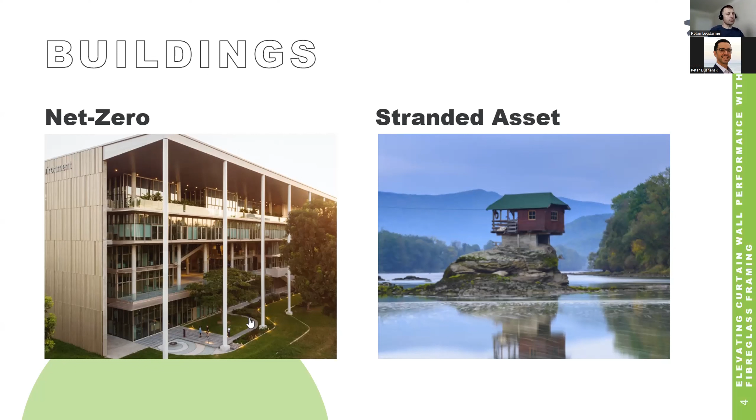Let's introduce a little bit why we had this presentation today. We need to live more and more in net zero buildings, and we want to avoid living in a stranded asset. But it's a little bit complicated because first of all, we have our existing building stock that we live with, and there's a lot of different things coming towards us. But let's explain how to approach and how to get to a net zero building.

First of all, net zero building, how do we see that? Net zero building, we mainly focus on operational carbon, but don't forget that also embodied carbon is an important aspect to cover. And how do we cover all these topics? We will go a little bit deeper in modern construction methodologies, low carbon supply, and then in the operational carbon, low energy use, measurement and verification to check if the implementation performs like it's needed, and going in the building operations. So that's for us a net zero building.

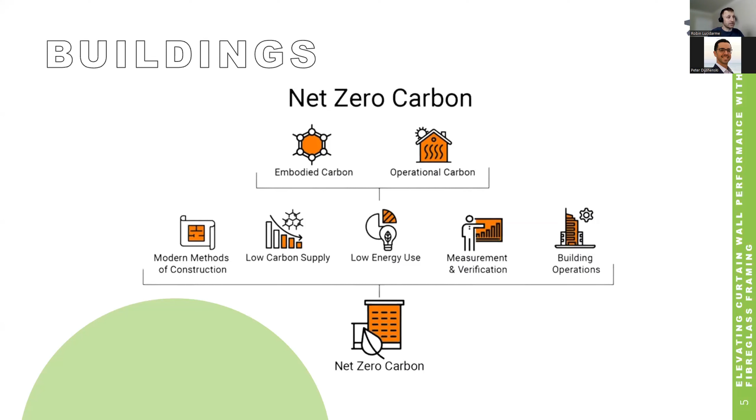Why do we explain that? If we want to hit our targets 2030, 2050, we see that the majority of the buildings, like 50% of the buildings, will still be there in 2050. And to hit our targets, there's two strategies. We can start with new buildings, tear it down, and then lower our emissions with 500,000 tons per square meter, or we can use our existing buildings and do a deep energy retrofit and lower our emissions even more.

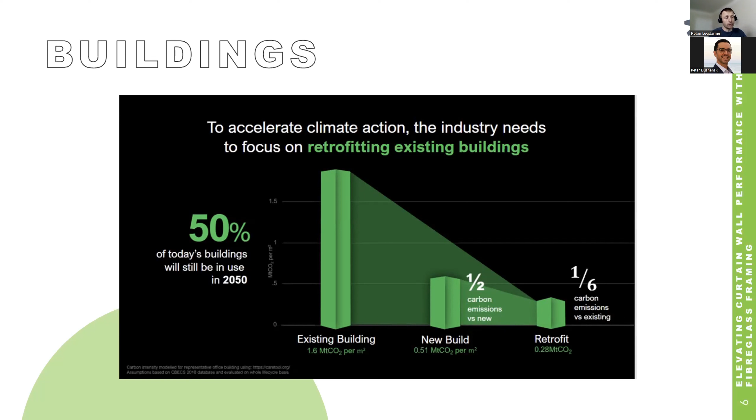It's a little bit also complicated. And why do we do that? We say, look, if you look at the buildings, you can see here 70% is going in operational carbon, but don't forget that 30% is also in the design and build. So that's why we wanted to go a little bit deeper in the technology of GlasCurtain as well.

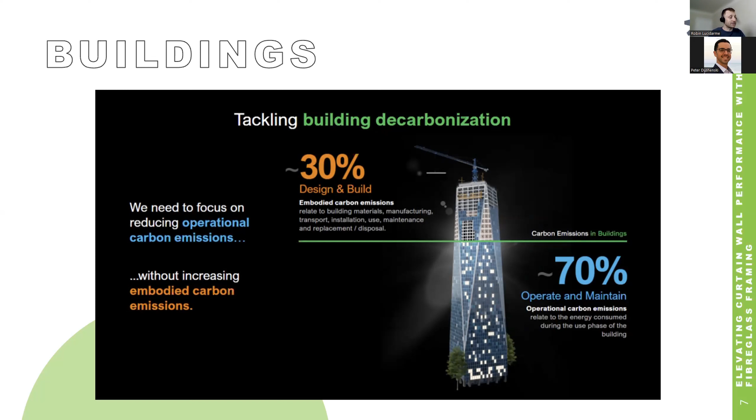So if you're a property manager or you manage a lot of buildings, the question is, do you have your class A, B, C, or D buildings? What are you going to do with it? Are you going to do a new build or renovation? And every building type has its advantages and disadvantages, but this is the situation we live with. And that's why we try to create strategies with the current technologies that are available on the market.

What is pushing the agenda to upgrade all these buildings? There's a lot of different things that happen. So for example, we have the carbon tax, and then we see in Vancouver, for example, we have the GHGI index that has also been used in different states, like the Local Law 97 or BERDO or BEPS, where your building gets an energy score, and you also need to report emissions, for example, commercial buildings larger than 50,000 square foot or multifamily larger than 100,000 square foot. So your building gets an energy score and indirectly also a property value.

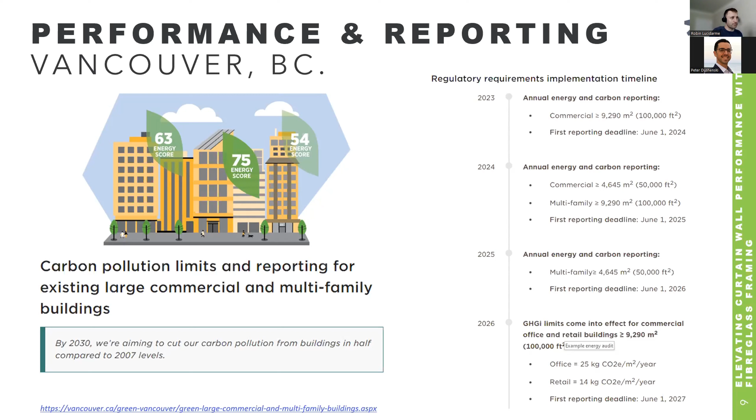We see that these values are sometimes difficult to report, but these values are imported in the Energy Star Portfolio Manager and directly reported to the city. Okay, what does that mean? So a typical building is using electricity, gas, and also water. But here we see in an energy audit that we have energy that's used for ventilation, lighting, cooling, and then lots of energy in the boilers and make-up air handling units. And we want to lower that as much as possible to avoid these penalties and lower the carbon tax.

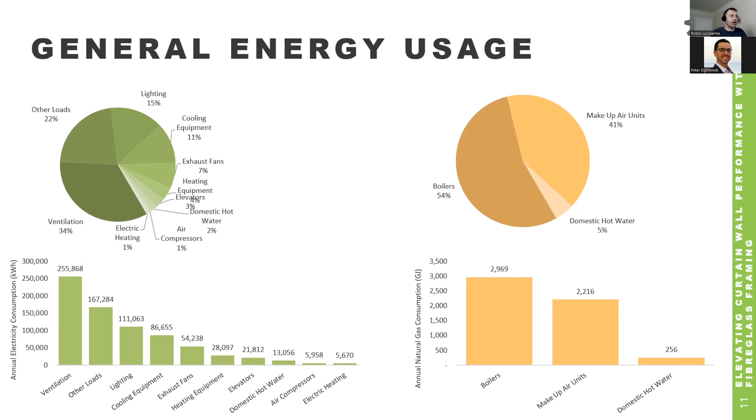But we say if we want to do that, we as stakeholders in managing buildings need to look at it in a different way. So how do we say that? You can approach it a static way or a dynamic way. And we want to go a little bit deeper in here. So the majority of the people, and sometimes we do that, but we try to adjust our model, say our utility data is, for example, $900,000, but we keep that flat.

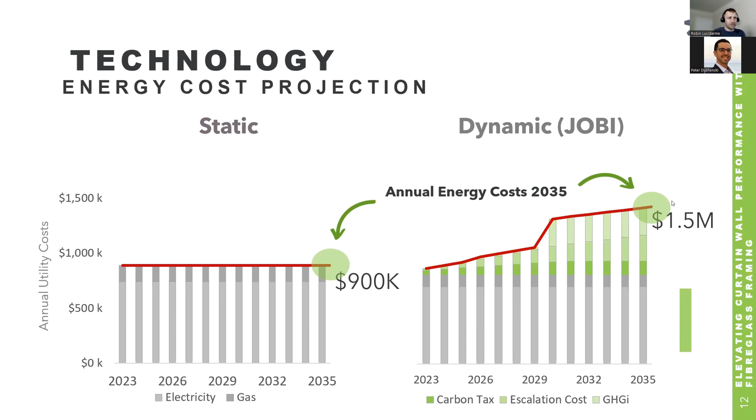But we know that it's not going to stay flat. If we add carbon tax, penalties, and inflation cost, we will see our utility cost is not going to stay 900,000. It will go to $1.5 million. So that's a different approach, and that's more the reality.

On top of that, what is our industry trying to do? For example, imagine we want to reduce our emissions by 30%. So we will implement energy conservation measures, better windows, better insulation, heat pumps, and so on, to lower our utility data from 900,000 to 700,000. And because we implement these energy conservation measures, we will have an avoided cost of $1.6 million.

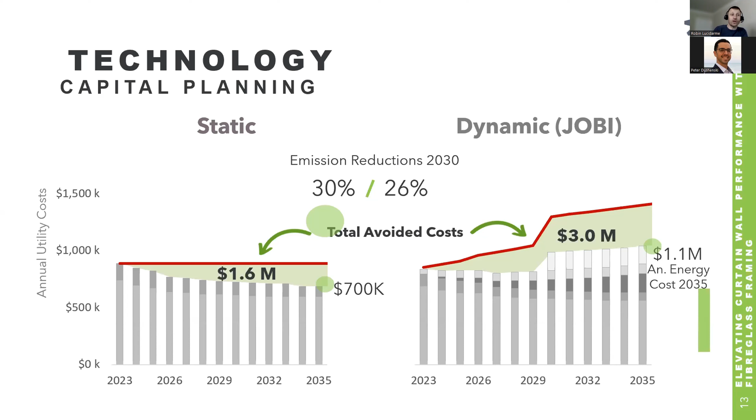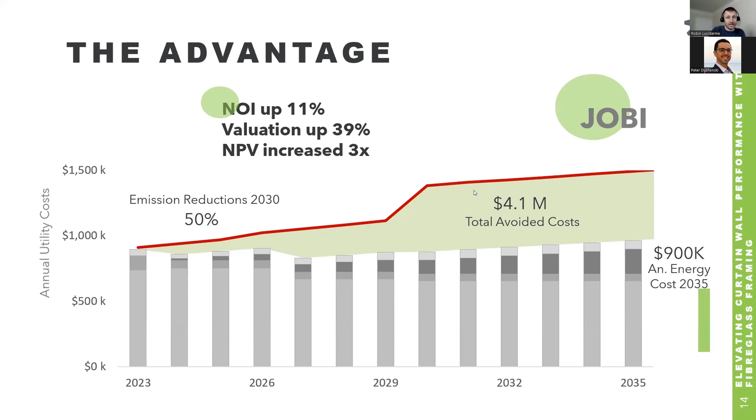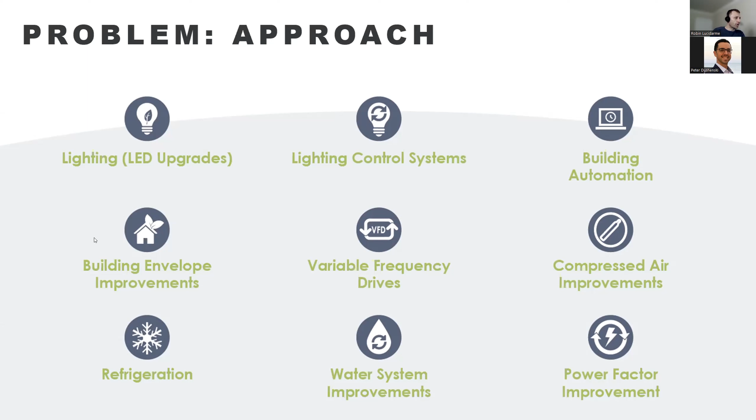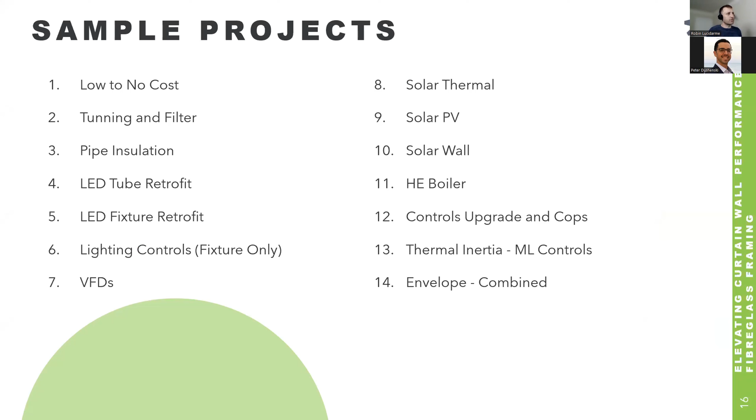Normally, you do an energy audit and you look at the energy conservation measures you want to implement: lighting, lighting controls, building automation, work on the building envelope, VFDs, and so on, like everybody knows. We take all these measures and bring them into a typical spreadsheet, and we look at them from a payback point of view. We sort them from fast to slow. And then we will only implement the payback that is 3 years to maybe 5 to 6 years.

But if we look at this model, we see that the project cost stays low, net present value is low, but our GHG savings is only 13% to 14%. So we don't hit our numbers, even though we need to hit our numbers of 30 to 50%.

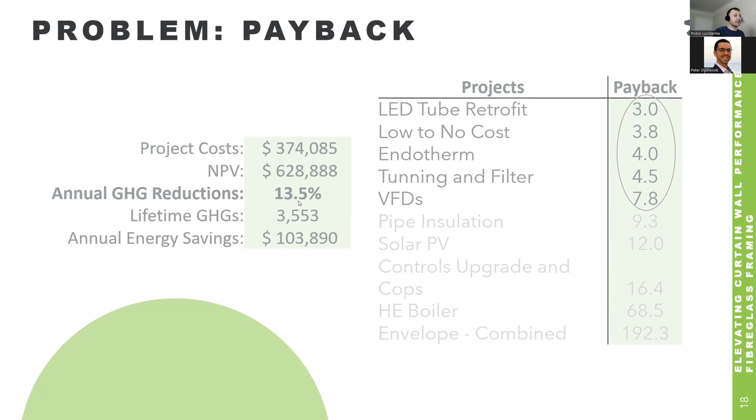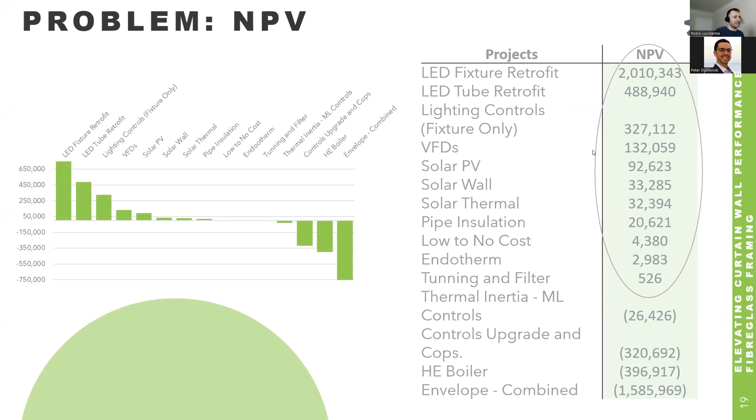So another approach could be to look at net present value, and then we see everything that stays positive has a net present value. We see that a lot more projects are now being considered, but still not all the projects are being done. And if we look at the math here, you will see that with these kinds of projects, you will hit approximately 30%. So it's better, but still not your 50%.

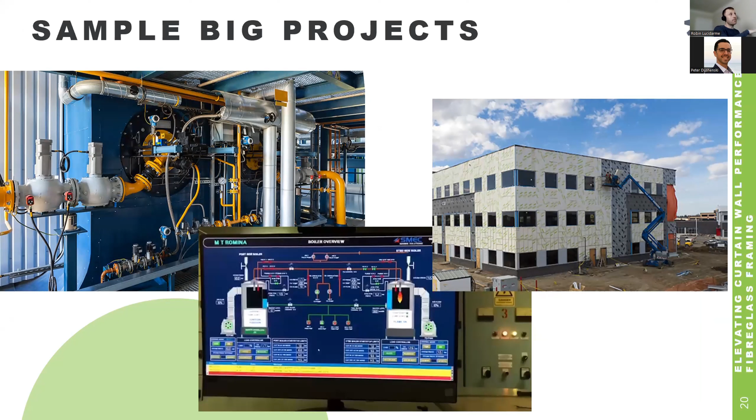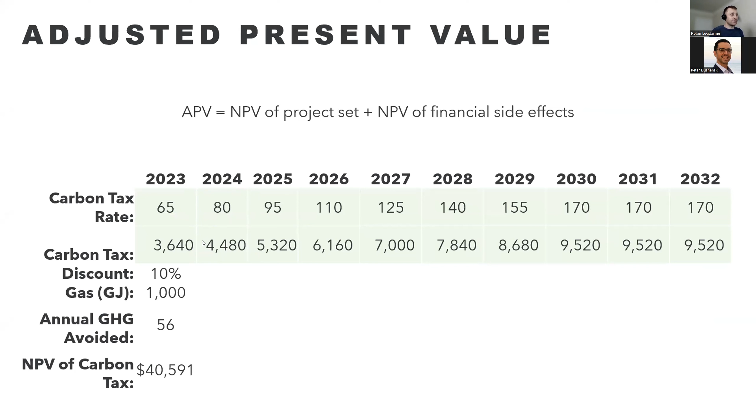Let's explain that a little bit in a real project: how to look, instead of at payback and net present value, at adjusted present value. Adjusted present value, for us in Canada, means adding the carbon tax per ton. So we will add an additional $4,000 to $5,000 per ton. So how does that look in reality? I have a couple of examples, but I wanted to keep it short.

For example, let's say we're going to invest in the building envelope. So we will do insulation, windows, and upgrade the roof, and we spent for that $1.9 million with a saving of approximately $27,000. Payback, 66 years; net present value, $1.1 million negative. So very bad, and we won't consider that project.

Okay, let's add a little bit of solar wall here. So we add more CapEx in this project, but we have more savings. Because we have more savings, our payback is better and our net present value is also better.

Okay, if we look at the next step, we know if we increase our building performance, so we don't have such a leaky building, we can actually underdimension everything a little bit more. So instead of 1.9 or $2 million, we can go to $1.8 million, have better savings, better payback, and better net present value. That already looks way better.

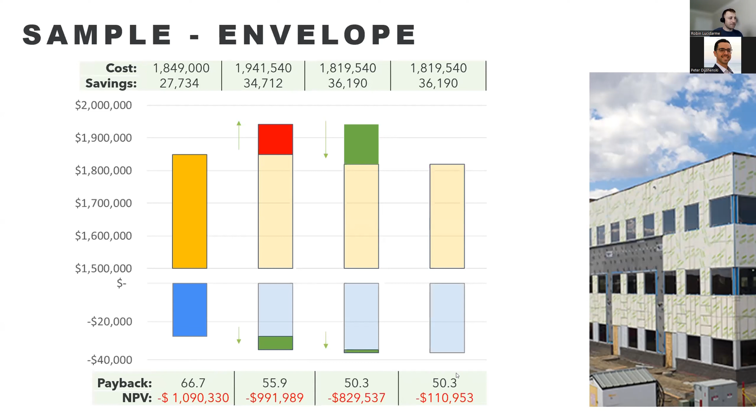But here we go from net present value to the next thing, where we look at adjusted present value, because you need to add the financial aspect also. And you can see the savings that we had here, the $36,000, is completely eaten by the penalties and carbon tax. So that means that the payback stays the same, but my net present value looks also much better.

And so if I look to the next scenario, if you start, for example, investing $1.8, $1.9 million and you go to a traditional bank, you will see that your loan will be between 4 to 6%. But if you use green loans, for example, instead of lending at 5 or 6%, you can lend at 1 to 2%. So your better financial model generates the same payback, but your net present value suddenly looks way better.

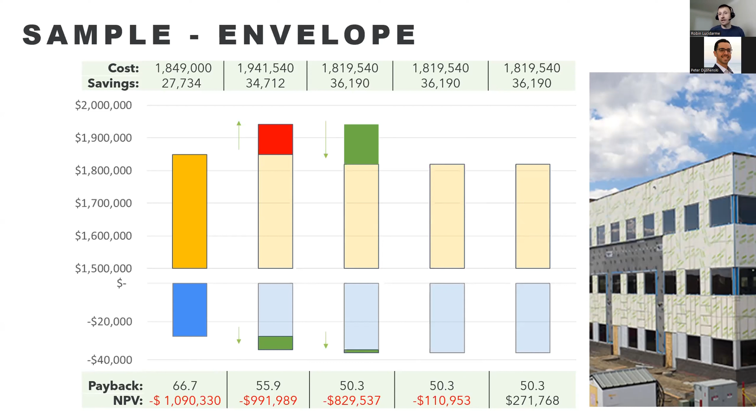And so why I introduce that: because if we want to hit our 30 to 40%, it's very important to look at these kinds of models and have a better idea why to go for building envelope, windows, insulation, and so on, which have a lower payback. But if you look at it this way, there's a better way to implement these projects. And that was for me the perfect introduction to go to the slides from Peter.

Thank you very much. My name's Peter. I'm the managing director of GlasCurtain. So today we're going to explore some of the most exciting advancements in building materials and how we can better future-proof our building facades. Specifically, we're going to look at next generation high-performance building materials and how they're transforming what's possible in the construction industry.

And so we'll take a look at this from an energy efficiency perspective, from a carbon perspective, as Robin has done a great job of talking about already, as well as from an architectural and aesthetic perspective, and then really just from a long-term perspective, which again is part of the financial conversation, part of the carbon conversation, part of the whole package. And all of this is really critical to what we'll call future-proofing our building facades.

And by this point, I've probably said the word building facade enough times that we should define our terms. I know we have a very broad audience here today. So a building facade is really part of the building envelope. And the building envelope is basically the skin of the building, everything that's on the outside. You can imagine that our buildings are like bodies, right? There's a skin and there's a skeleton. The outside is the building envelope, also called the building skin, and that's the roof, the top horizontal aspect, the facade, which is the vertical aspect, and then, of course, the foundation underneath.

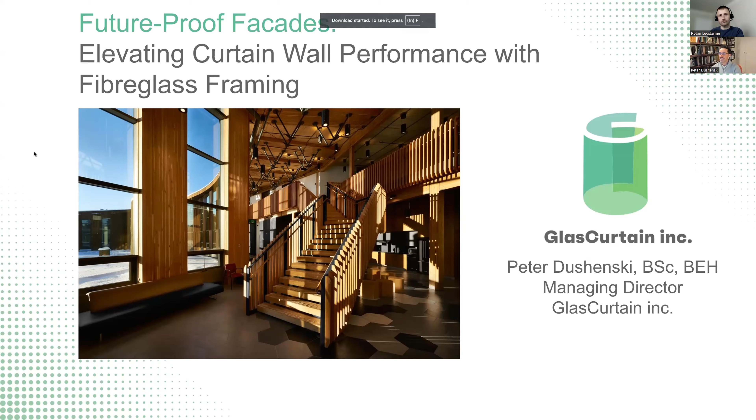Today, we're going to really focus on the vertical part, because this is really the defining part of the building in so many ways. It's the defining part from an aesthetic, architectural perspective, but also in terms of how it impacts the occupants. Because after all, facade has the same root word as face, right? And so this is our representation to the world, but also how our buildings make us feel and how they allow us to be healthy and productive, and make sure that our buildings and ourselves look good and are doing good work at the same time. So let's dig into high performance building facades.

And so, what are some of the jobs that we're asking our building facades to do? These are hardworking parts of our buildings. And there are several ways in which the best facades differ from run-of-the-mill facades, the average, very conventional stuff. The best stuff really is a cut above in these categories. So number one is definitely energy efficiency and sustainability. In most of Canada, and definitely in the colder parts of the Northeast United States, better building facades mean better R values or lower U values.

And Robin asked me to again define my terms here. What are R values? What are U values? Why are these things important? So R values are really the way in which we measure insulation values. A higher R value means that you typically have thicker insulation or better insulation.

So it's kind of like, the higher the R value, the better your jacket is rated, to like a minus 10, minus 20, minus 30, minus 40. The higher the R value, the warmer your jacket is. You can kind of think of it that way.

Suffice it that in our colder climates, especially in Canada, especially with rising energy costs and increasing cultural emphasis on environmental concerns and regulatory emphasis on environmental concerns, we now can use innovative materials to improve these insulation values, to be our warmer jackets, and to create building facades that better maintain a consistent internal temperature, which will then drastically reduce the need for heating and cooling.

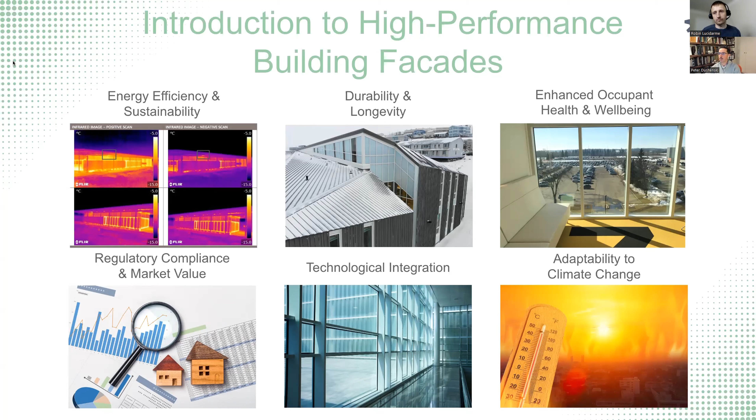And there's much to be done when it comes to improving this compared to, again, the run of the mill. We'll loop back, as we mentioned, to these passive principles. Let's dig into what these passive principles are and how we can apply them more broadly, even if we're not designing a quote unquote passive house building.

Many building codes are starting to target essentially these principles, if not in name, then in practice, right? The BC Energy Step Code is doing this, the Massachusetts Stretch Code is doing this. Those are the two leaders in their respective countries, and others are following. And so what are these passive principles?

Number one is enhanced thermal insulation. Thermal insulation is really the cornerstone of passive design. So here we want to use building facade materials with high insulating value, so warmer jackets again, to minimize thermal bridging. What is thermal bridging?

Thermal bridging is sort of like if you have your jacket unzipped. That's thermal bridging, right? The outside is not staying where the outside should be, and the inside is not staying where the inside should be. So you basically have materials that are allowing for conductivity between the inside and the outside of the building.

And materials like aluminum, or metals in general, are very good conductors, right? This is why we use metal for wiring. This is why we use metal for radiators. This is why we use metal on our engine blocks and our motorcycles, why you have all those fins. On those kinds of things, we're trying to dissipate heat.

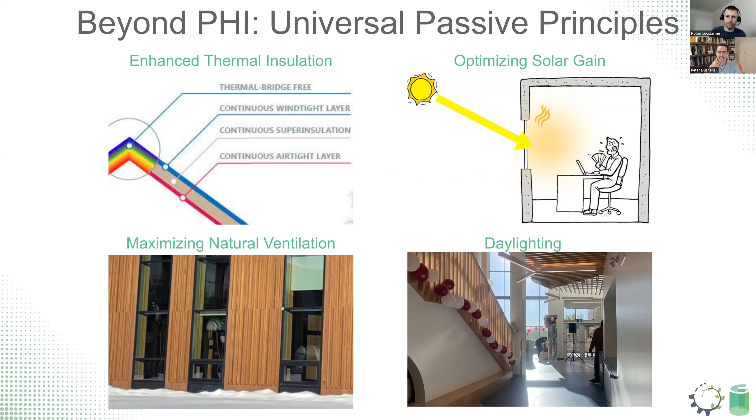Something like the Massachusetts stretch code basically went from the equivalent of BC Energy Step Code 1 to Step Code 5, not in 15 years, in 1 year. That's an example of a really ambitious regulatory push, throwing the market into a little bit of disarray in the short term, but I think in the long term really moving things forward and really accelerating what's possible. So I think we see both approaches, but that's kind of a unique approach.

Let's talk about fiberglass, the advantages of fiberglass. So we've talked about all of the things that a high performance building facade has to do, which is a lot. And then there are all of the passive principles. So where do the materials come into this? We're asking our building facades to accomplish a lot, frankly, and an increasing amount.

And particularly our windows and curtain wall, which, no matter how good they are, are always going to be the weak link, thermally speaking. And so we have a few different materials to choose from. Some are better suited to our current and future requirements, and some are less so.

Since the 1950s, we've seen huge improvements in glazing technology. We've gone from single glazing to double glazing to triple glazing, quadruple glazing, low-E coatings, argon, films, vacuum insulated glass, warm edge spacers. The kitchen sink has really been thrown at glazing innovation. Meanwhile, framing materials, which are what holds the glass in place.

So if the glass is being held here, the framing material is the exterior cap of our curtain walls, the interior frame of our curtain walls. The glazing is going in the middle vertically. The framing technology has broadly stood relatively still because it's mostly been aluminum, and aluminum has been the most common commercial choice for curtain wall, for window glazing, because it's been really the easiest and the cheapest choice. And especially in the post-war era, you can make a wide variety of shapes with it. It's relatively light. It's relatively easy to work with.

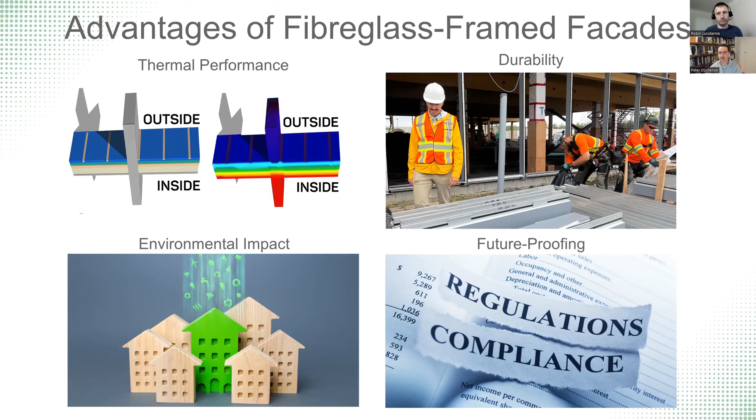So these are a lot of very tangible benefits, not the least of which is that all of this is made in Canada, right? That's kind of cool that we can actually make high performance products in Canada, that we don't have to just import them from other parts of the world, that we can create sustainable local jobs and enhance our industrial knowledge and capacity here, and then even create export opportunities of

this Canadian innovation. We don't just have to export Justin Bieber, maple syrup, and I don't know, Celine Dion or something like this, or Canada Goose jackets. We can innovate cool things. Canada has a lot of cool things, not just oil and lumber. We can create real things, and we have talented people in this country.

And a really standard example of this is, soft sales pitch here, Thermaframe 9 PH, which is the highest thermally performing curtain wall in the world, and the first curtain wall to be certified to the Passive House Institute. That's Darmstadt, Germany's cold climate criteria, which is 0.60 watts per meter squared Kelvin, framing glass overall, which works out to a U factor of 0.11 or R9 overall framing glass.

And this is along with the highest phA+ efficiency class rating for air tightness and thermal comfort, as this globally recognized third-party testament states. And it's quite interesting. What the actual Passive House Institute in Germany does quite uniquely is it certifies individual building components.

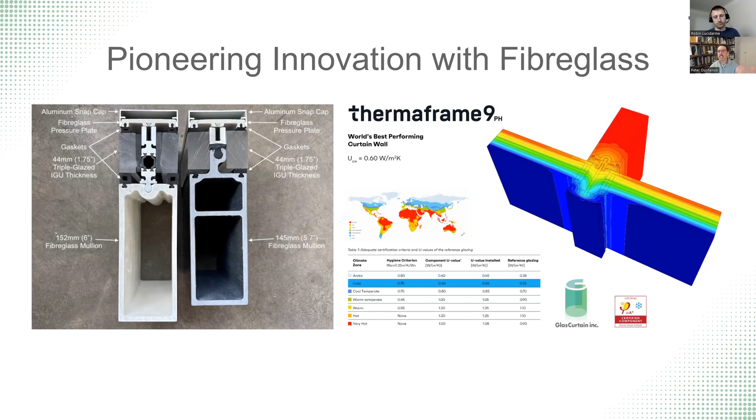So all of these things can be done with fiberglass, and this really sets the stage for the next generation of high performance building facades. And all of this is very exciting and optimistic for the future, because it demonstrates industry leadership and commitment to sustainability for the manufacturers leveraging this new material, as well as building owners who are installing it and architects who are specifying it.

An example of this is the new academic building at Concordia University of Edmonton, which will be the first in North America to utilize triple glazed vacuum insulated glass units, enhancing the center of glass performance by 50% relative to conventional triple glazing. And that's 300% better than double glazing. So this groundbreaking vacuum insulated glass system paired with our next generation Thermaframe 8 fiberglass framed curtain wall marks a significant milestone, and it will result in the most thermally efficient curtain wall ever seen in North America.

And there's much more in the pipeline. What we're seeing from coast to coast to coast is an ever-increasing demand for fiberglass frame systems, particularly for institutional projects aiming for net zero, for LEED, but even increasingly these higher performance, BC Energy Step Code 5, Massachusetts Stretch Code, Toronto Green Standard, all of which are rapidly becoming table stakes, really, for new government buildings, universities, healthcare, and owner-occupied commercial buildings, where they're really looking at this payback period and they're really saying, okay, this makes sense because

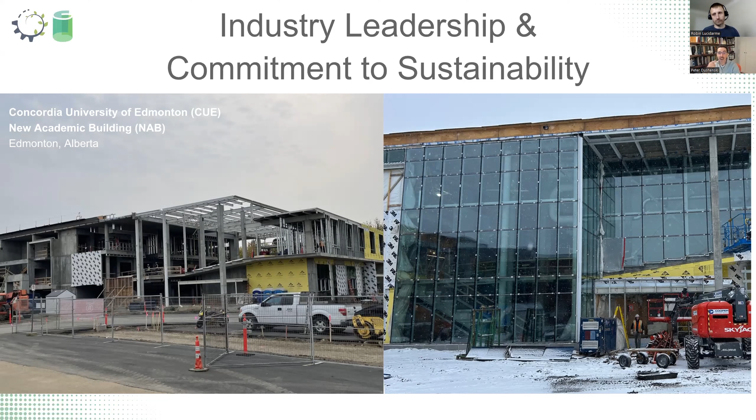we're going to save all of this in the long term. We're going to future-proof ourselves against all of these potential future issues. This is a really, really smart investment. And so fiberglass's really unique properties really do make it an exceptional solution for the challenges of high performance building facades in the 21st century.

But of course, there's still no one size fits all. And so whether that's for building facades or for anything else, different climate zones, different building types, and of course, different clients pose different constraints on our design considerations. And we therefore have to tailor our approaches for each new building to each part of the world. So in colder regions, which is most of Canada, the primary concern for building facades is thermal performance and of course aesthetics. And here we can leverage those passive principles.

And in this domain, fiberglass frame curtain walls excel for their low thermal conductivity and ability to offer higher window to wall ratios while still meeting the stringent energy codes and voluntary certification standards. Because if you just take the prescriptive path on a lot of these things, you'll end up with very small windows and not terribly attractive buildings typically. So when we exceed the standards, when we use better building materials, we can expand the design possibility space, and we can design beautiful buildings and high performance buildings, and those need not be mutually exclusive.

To address these regional challenges that we face with building facades, fiberglass can do all of them. And whether that's with unique thermal breaks, glazing types, finishes, custom caps, fins, sunshades, solar panels, you name it, fiberglass has the ability to be customized to design beautiful, high performance buildings that respond effectively to their local environments, enhancing building performance and value from day one.

But yes, I'll just answer the question from Abdul here. Whether this building facade improvement makes a good business case for an existing building, it really depends on the condition of the existing facade, right? If the existing facade is shot, if the framing is not in good shape, the glazing is usually the first to go. Once the glazing is the first to go, the best bang for your buck is usually just to replace the glazing. You can just get better glazing. If you're using 40-year-old glazing, getting brand new glazing will do wonders for most buildings.